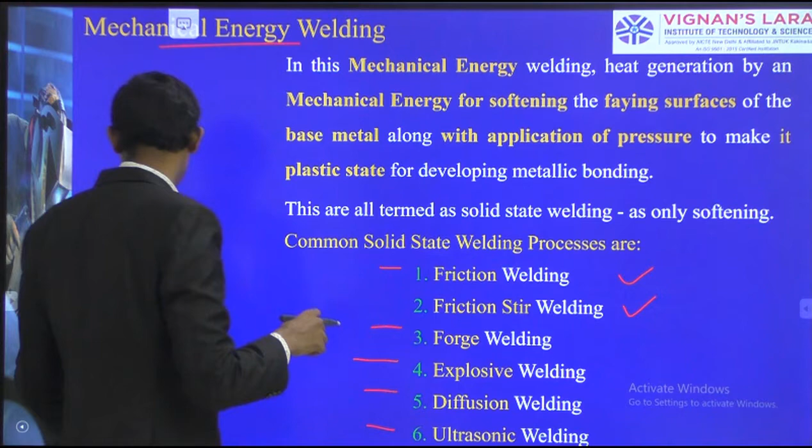In this class we are going to see friction stir welding. It is also one of the other methods of friction welding, even though the heating occurs by rubbing actions. It is another variant of friction welding.

What is the necessity of friction stir welding? We want to know. We have come across many arc welding methods and each has its own nature. When compared to SMAW and TIG welding, we have used inert gases.

Similarly, welding of aluminium is very difficult as it melts at a very low temperature, around 600 degrees. It becomes difficult to generate heat, melt, and solidify properly.

Meanwhile, microstructure changes also occur. Therefore we should not reach the melting point of the material. Accordingly, we have formed friction stir welding, a solid state joining process which will not reach the melting point, and therefore we can weld in the semi-solid or plasticized zone itself. The material is heated into a readily deformable condition, and at that time we give pressuring or stirring actions and solidify it.

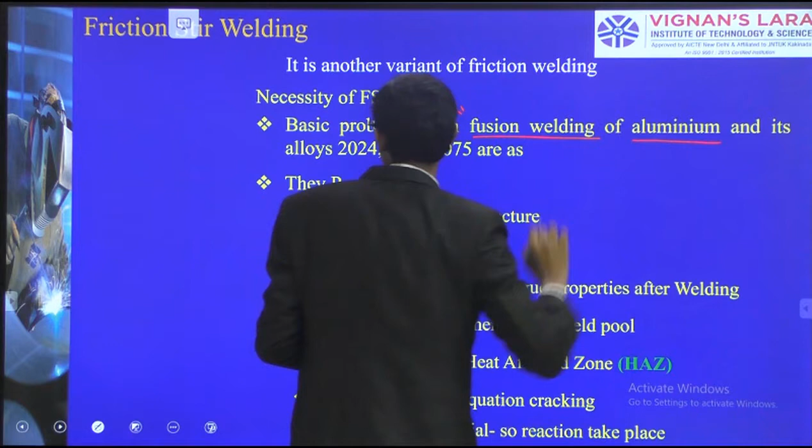So that is the basic problem with fusion welding. Fusion welding of aluminium, like some grades of 2024, 7050, and 7075, has the ability to generate dendrite structures, which we have seen in metallurgy during solidification.

Dendrite is nothing but a tree-like formation structure which is sharp, and these sharp incision points generate cracks, which is not good for the material. That should be avoided. In fusion welding of aluminium, dendrites form and should not. Then we should not do fusion welding at high temperature.

The temperature should be reduced, and that is why we go for friction stir welding. Dendrite structures also form porosities, and due to this, the mechanical properties and fatigue properties after welding reduce. We need more strength compared to the base material, but here it is reducing, becoming inferior.

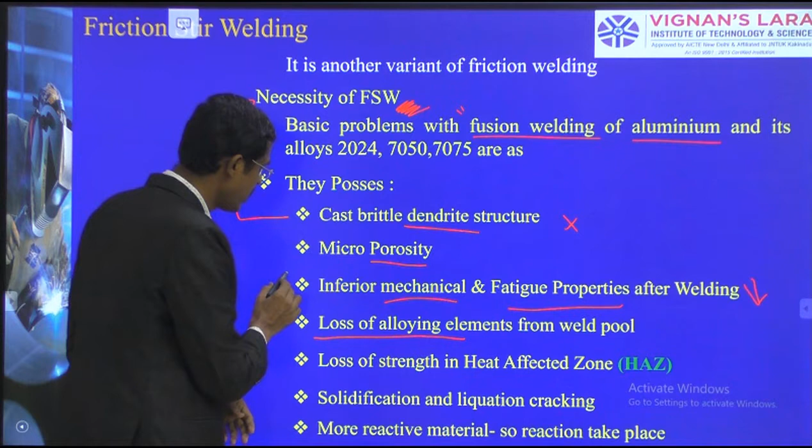There is loss of alloying elements. Some alloying elements which are added get evaporated due to the high temperature of the fusion welding process, so the benefit of elements added for improving mechanical properties is lost. This causes loss of alloying elements and loss of strength, inferior mechanical properties in the heat affected zones.

Solidification causes liquation cracking, as dendrites cause cracking. Also, aluminium is a more reactive material, so reactions take place, and at high temperatures, some reaction occurs.

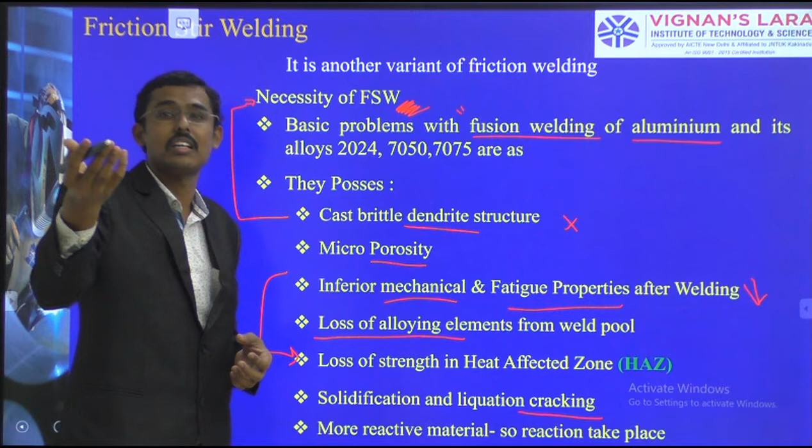When we increase the temperature of the specimen, the kinetic energy also increases and the reaction increases. Such things should be avoided, so this is what happens in fusion welding of aluminium.

Therefore we are trying to do aluminium welding through a solid state process, a solid joining method called friction stir welding. That is our idea. So how can we do aluminium welding by a low heat input process? We can do friction stir welding. That is what we are now going to see.

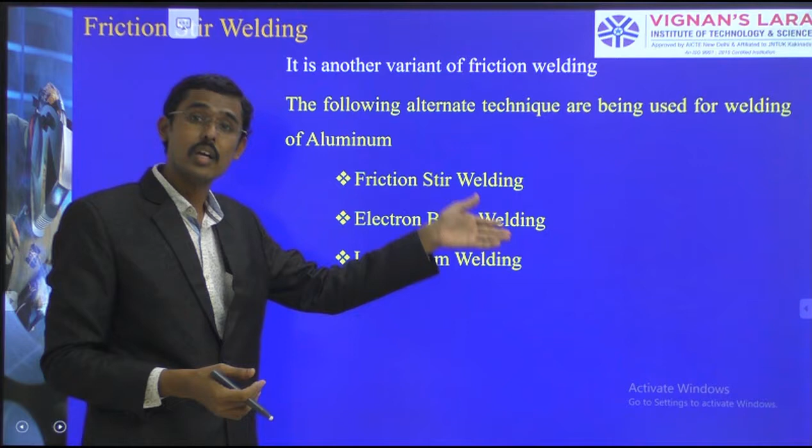Electron beam welding is also possible, and laser beam welding is also possible. But now we are going to see friction stir welding specifically.

It was invented by the Welding Institute of UK in 1991, a very recent invention. It is the most significant development in welding technology in the decade, and it is a green technology.

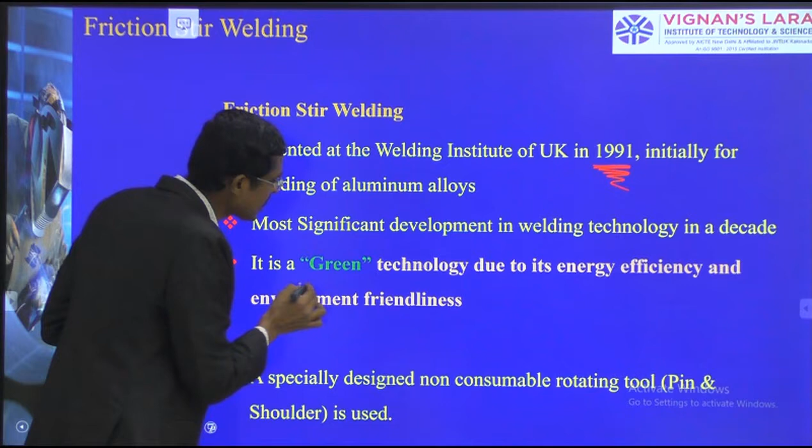What is this green technology? The same term we have already seen for friction welding. There is no smoke, no filler, no shielding gases, nothing, no spark. These factors make it environmentally friendly, a green engineering approach that will not affect the environment. Therefore we call this a green technology.

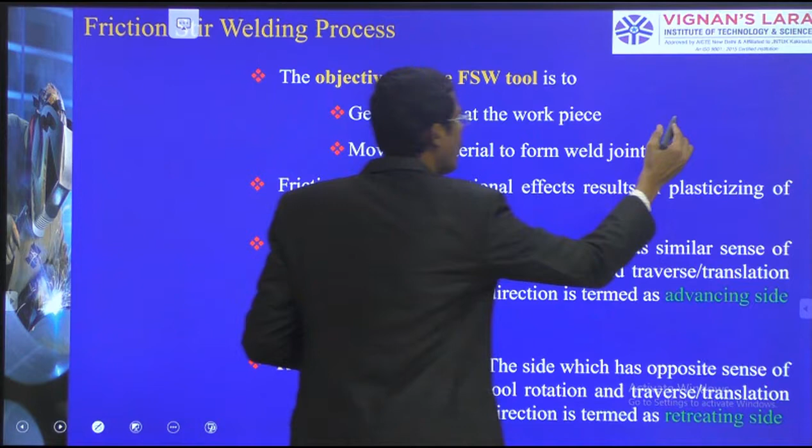So, the objective of friction stir welding: what do we have to do? In this method, I have taken two specimens, and I want to weld in this zone. I am inserting a tool here and going to stir.

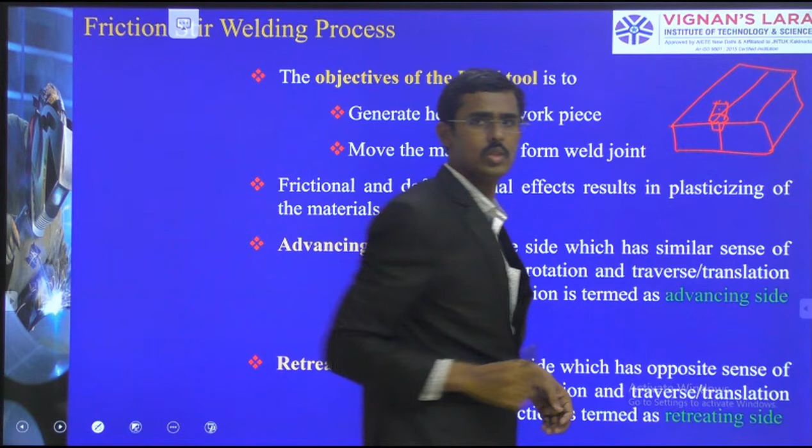This stirring action takes place. In such a way, the center part will stir, generating stirring action, which generates heat.

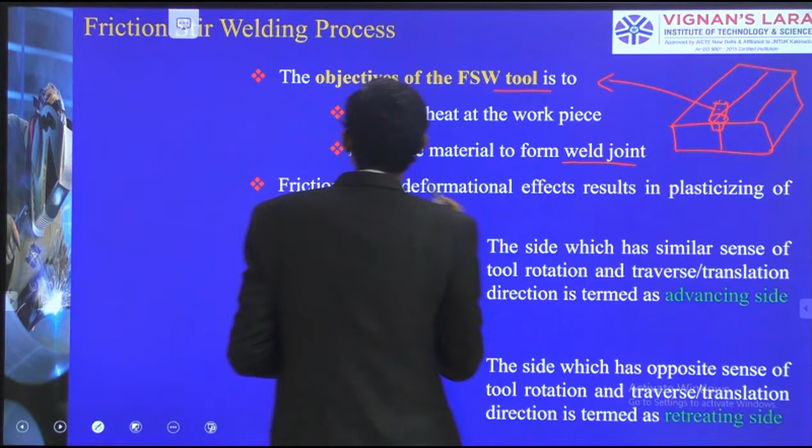The tool is going to make the plasticization zone readily deformable, generating heat at the workpiece. The use of this tool is to generate heat at the workpiece and move the material to form the weld joint. For these conditions, I am using the friction stir welding FSW tool.

Frictional and deformational effects result in plasticization of the materials. Here there are two categories: one I am calling the advancing side, and one I am calling the retreating side.

When the tool is rotating in this direction, I am calling this side the advancing zone or advancing side, and here I am calling this the retreating side. The clockwise rotating side is the advancing side, and the other side is the retreating side.

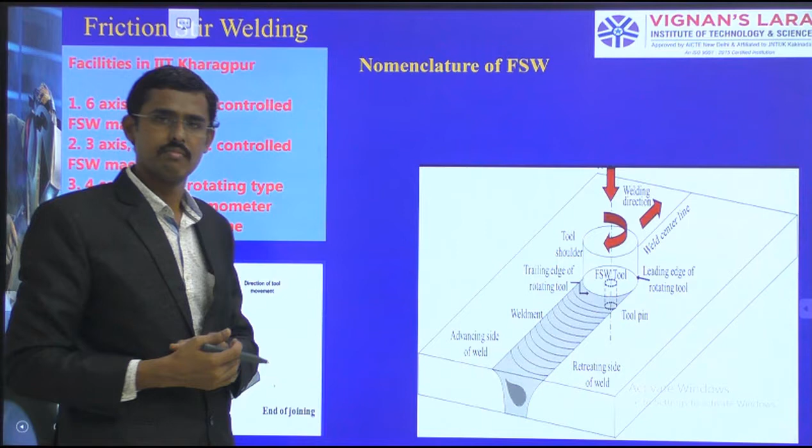So here we came to the setup. We want to weld two specimens, number 1 and number 2. Here we want to do the welding method, so how can I do it? I have taken one tool which contains a shoulder and a small pin.

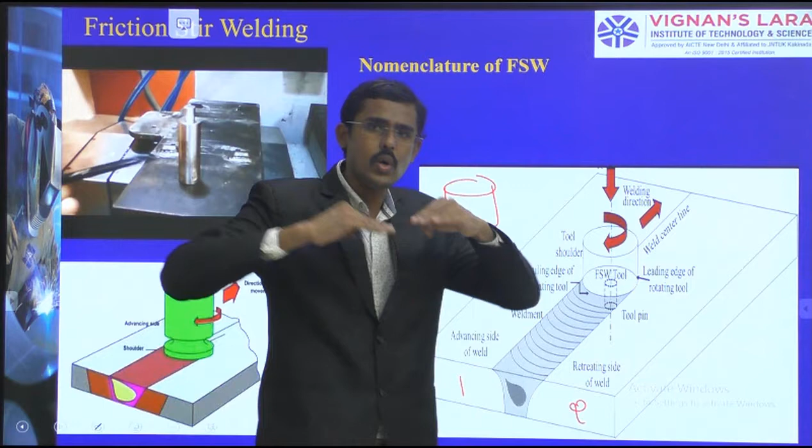This pin I am going to plunge inside the two specimens. Here there is no gap, zero gap, and we have not taken any edge preparation. Two flat specimens I have taken here, and I am inserting this tool by plunging, putting a hole and going inside.

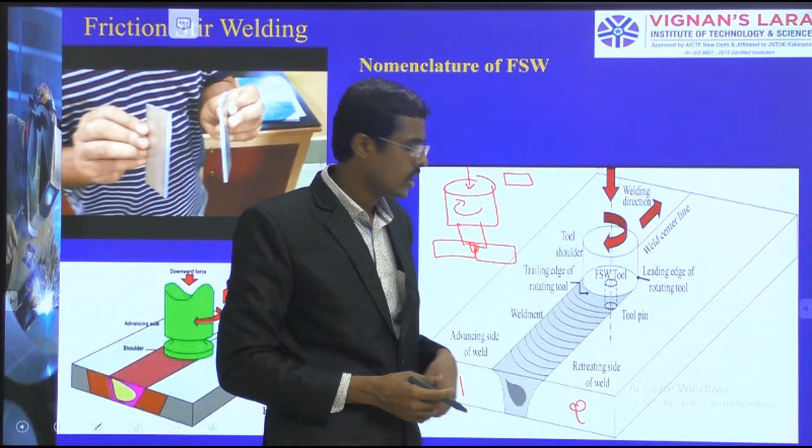After that, I rotate with the application of pressure and rotation of this pin, so stirring will happen. Application of welding pressure and stirring action on the friction stir welding tool generates stirring action in the middle. The advancing side material will go to the retreating side, and the retreating side material comes to the advancing side after stirring action.

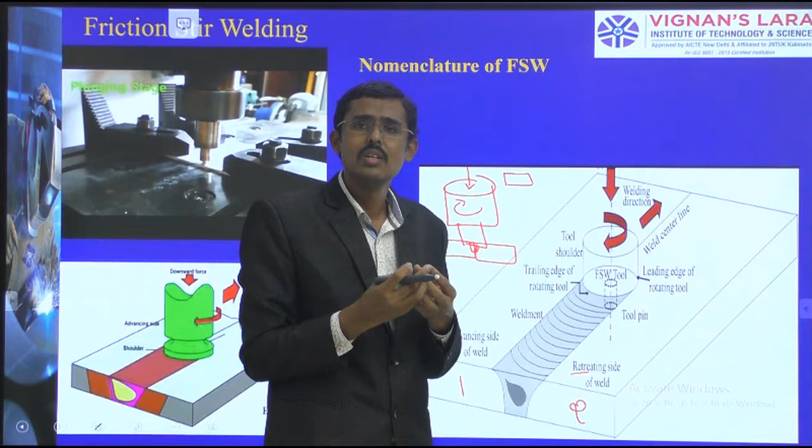Therefore, we will get equiaxed, minute, finer grains, which are directly related to high strength. So how are we doing this? I want to keep moving in this direction. After rotating and stirring action, I am moving towards the other end.

Here, see, in this there is a line, a straight line. There is no edge preparation we have done, it is flat. No V-groove we have taken.

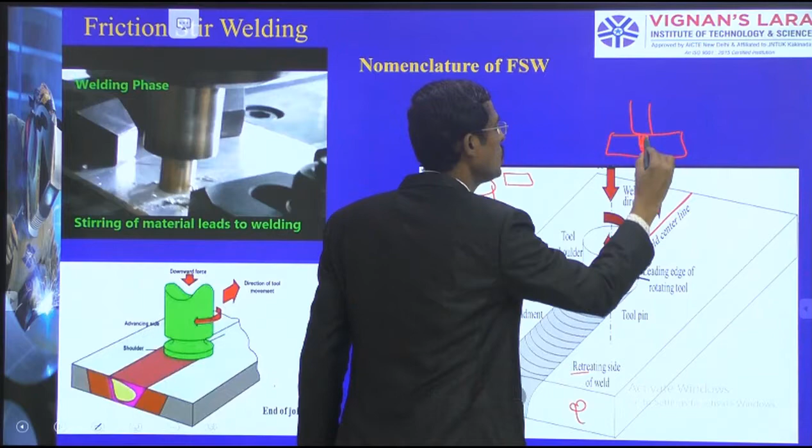Just like that, we have placed the tool here and plunged it inside. The tool plunged inside and stirring action takes place, and we move those things. In such a way, we can able to weld this.

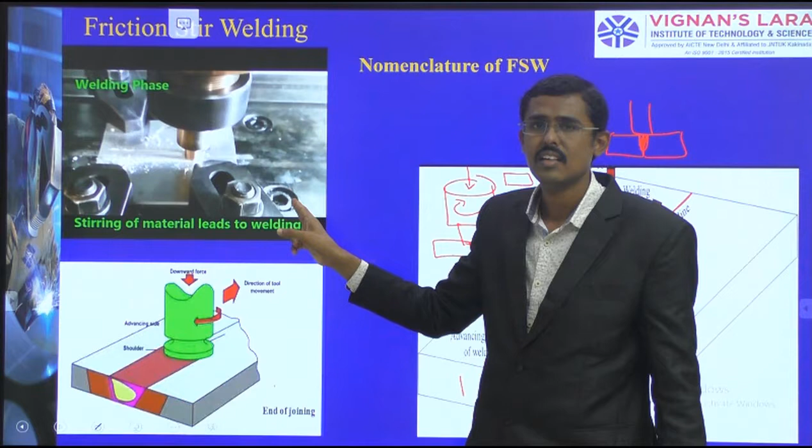The same video I have played here for our understanding. See, the two plates have been taken, in the welding phase we keep on rotating, and it moves from one side to the other side with respect to pressure and the rotation of the tool.

Two parameters I have used: for the tool I am giving pressure and also rotating the tool. See, after welding is completed, I have taken out the tool and cleaned it. Here we are getting a beautiful flat surface, but a hole is there.

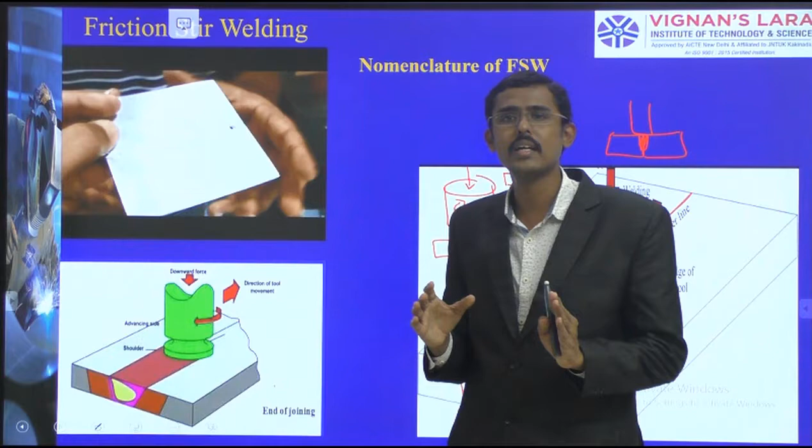This is to be cut as scrap, so this we can use. This total length we can use as a complete weld joint, with no edge preparation, no filler, no shielding gas. Only we have used the tool to rotate, with respect to speed of rotation and applied pressure, we can able to do the welding.

See how we can able to go ahead. A second video will play again here showing how these various stages we are calculating to do those things.

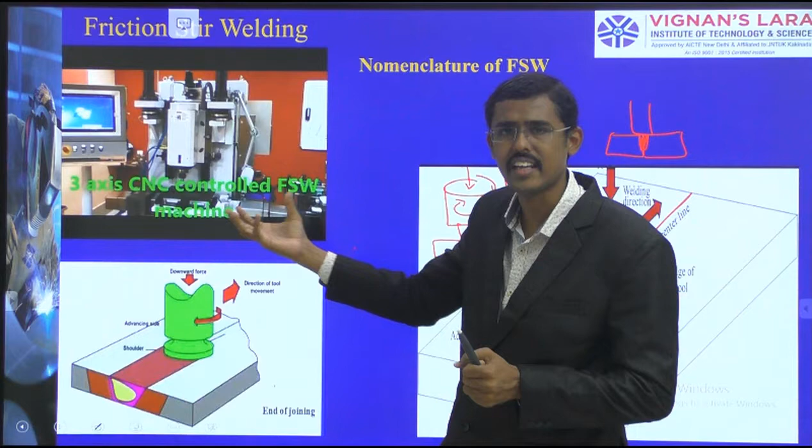This is the setup of the machine for the friction stir welding process, and it can be able to do in a simple CNC machine. We have a board and a setup and we can able to do this.

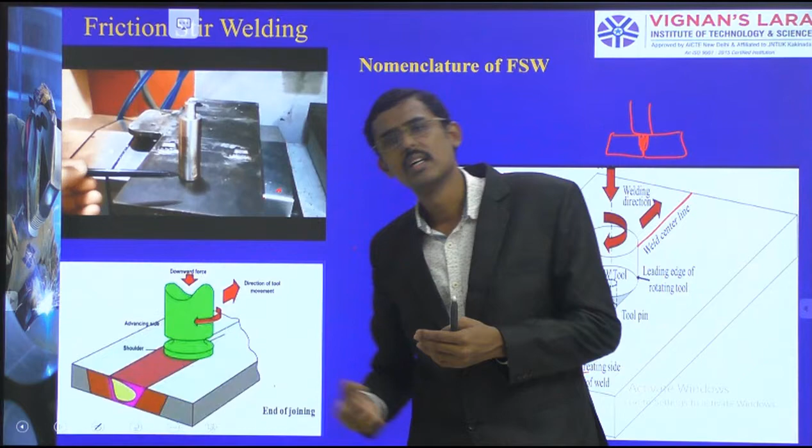See how the tool is used. This is called the shoulder, and the pin is there which goes in depth up to the total thickness of the specimen, not more than that. The pin profile should not be beyond the thickness of the specimen; it should be equal or slightly lesser, so in case of a 10 mm plate, we can take 9.8 or 9.7 for the pin profile.

See here in this setup we have the fixtures, and we have fixed the tool over these conditions. Now the plates have to be fixed in between those fixtures and the stirring action is to be done.

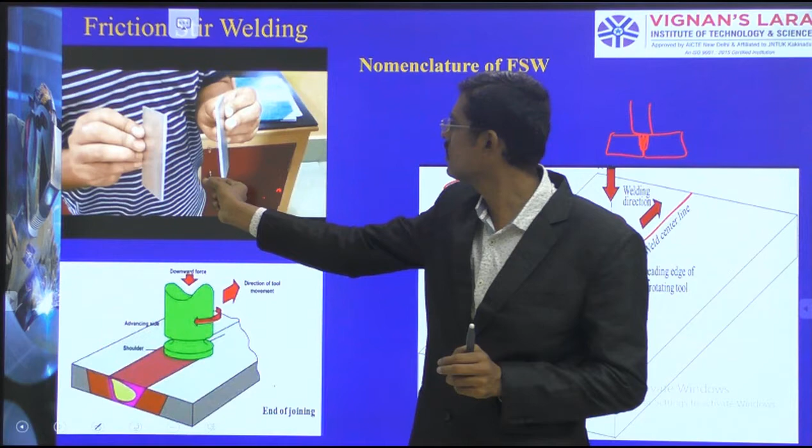We have taken two plates of aluminium AA1100 grade material. I am going to weld a small thickness specimen, maybe 2 to 3 mm thick. Aluminium has a low melting point, and it should not melt into dendrite form. Therefore, I am preferring this solid state joining method. Through fixtures, I have fixed it so no distortion will take place due to this fixing action.

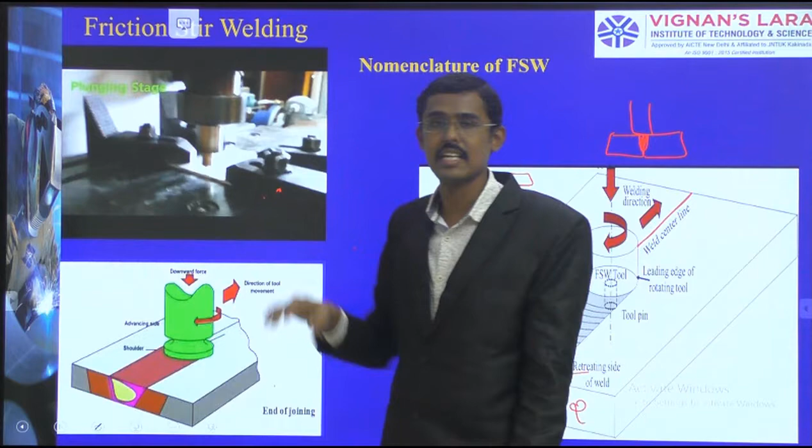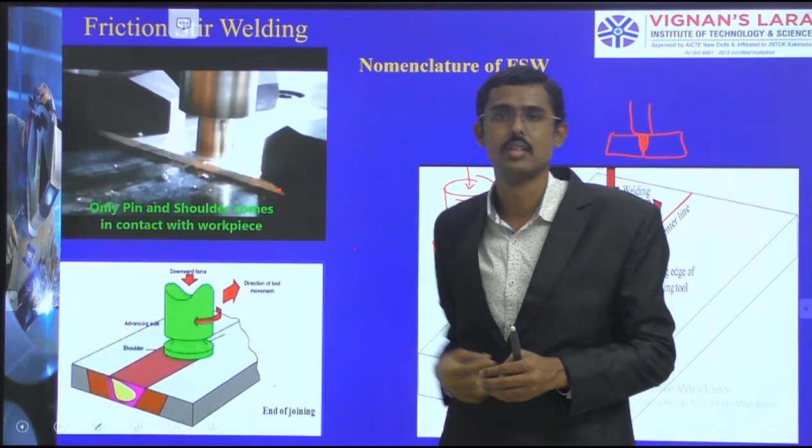So first, the plunging stage. I am inserting the tool from where the welding has to be started, plunging inside the workpieces. After plunging, we have to move. Heat generation due to friction and plastic deformation will take place there. After that, this plastic deformation due to the rotation causes material exchange from the advancing side to the retreating side and back. This rotating tool forces material all around, and therefore we are getting equiaxed finer grain.

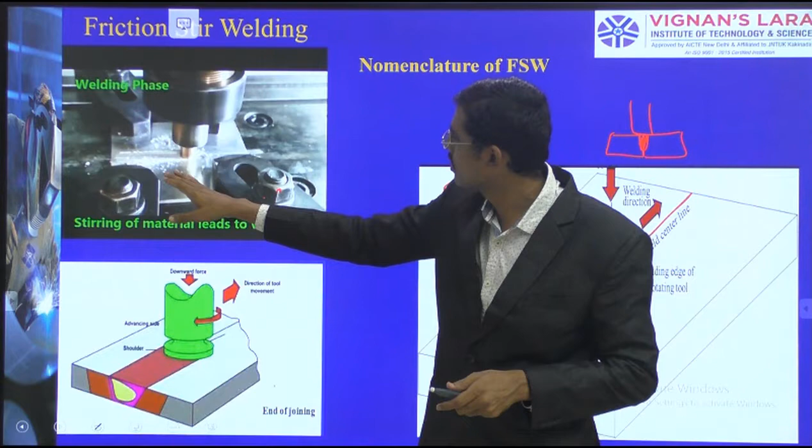Stirring of the material leads to welding, so joining occurs in the semi-solid state itself. We have not yet reached the melting point of the material. After completion, we get a smooth surface.

We have to know about the tool geometry also. The tool has a shoulder whose rotation against the job generates most of the heat required. How is this heat generated? We take a tool and rotate it, but the idea is the tool should be stronger than the aluminium workpiece. If it is lesser than or equal to it, due to the stirring action, the same melting point and same heating occurs.

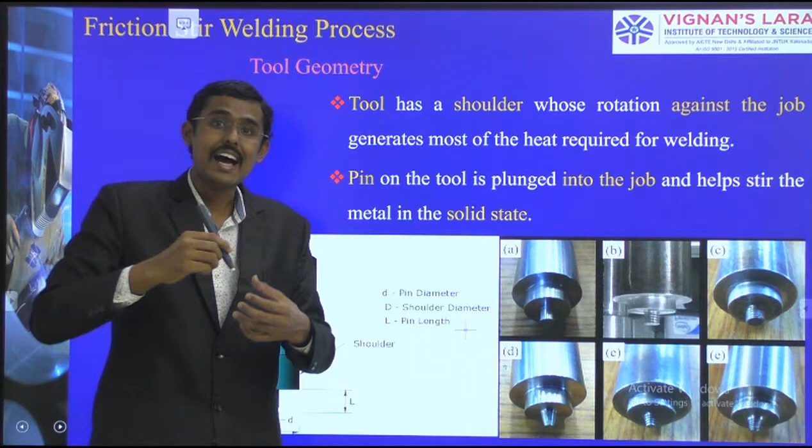Then, like the aluminium workpiece heating, the tool heating will also occur, so the tool will also wear, get damaged, or reach a plastically deformed state. If the tool itself is plastically deformed, it will also melt and mingle with the workpiece, and welding won't occur further. Therefore, the tool should have high wear resistance and a high melting point. The tool has a shoulder whose rotation against the job generates most of the heat required for welding - this is about the tool shoulder, this zone.

Where is the workpiece here? I have kept the workpiece in this zone - two workpieces I have kept. This is the pin, small, with length L equal to the thickness of the specimen.

So this pin is going to go inside and plunge, and we are going to rotate. I'm talking about the tool, shoulder, and pin. The pin on the tool is plunged into the job and helps the stirring action, keeping the metal in the solid state itself. In welding and stirring, we are not reaching 1500 or even 600 - aluminium's melting point of 600 we are not reaching. We are doing the welding itself at around 400, 350 degrees.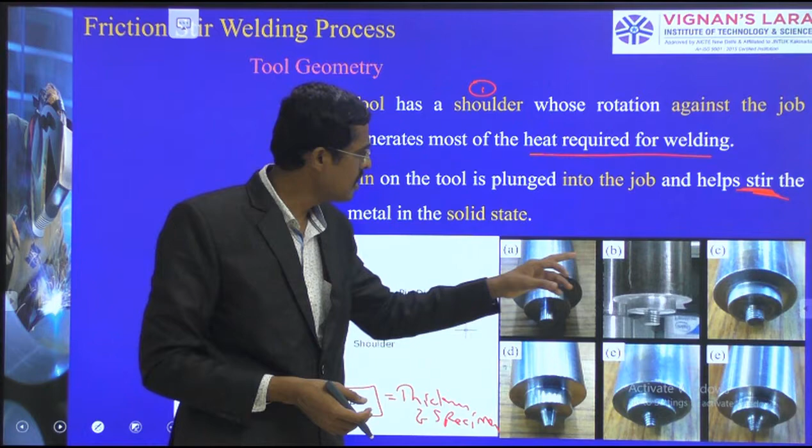So this research looks at how to generate heat with respect to various pin profile methods - cylindrical, threaded, conical, and conical threaded. Different methodologies create different forces, and with respect to that we can generate heat efficiently, or otherwise make the material finer. Due to these threading actions, the aluminium material becomes finer grained, so strength increase can be achieved through these pin profiles.

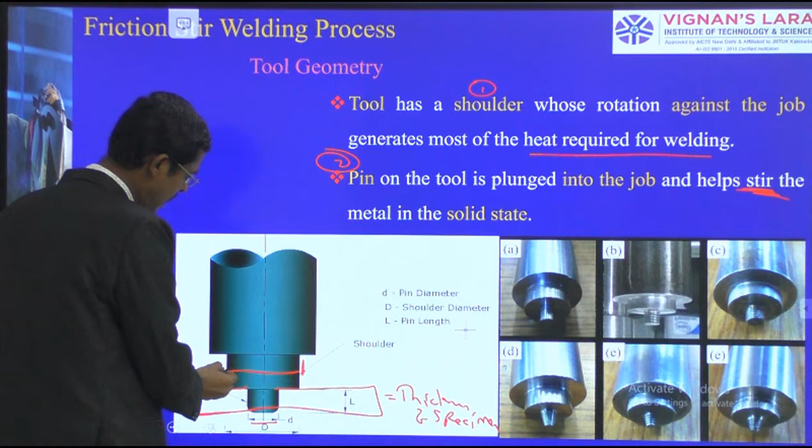See, this is the diameter of the pin - we should understand this is the shoulder diameter and this is the pin diameter. The pin goes inside, and the shoulder applies force and holds it - like a drilling action first. If it is drilled, the material inside comes straight out, but it should not, since we are doing welding. So it should be plunged back again, forced back again. Therefore, I am giving the shoulder diameter to stop the chipped material from coming out.

We stop the material there and press it back inside itself, and then the rotating and stirring moves on. That is the use of the shoulder.

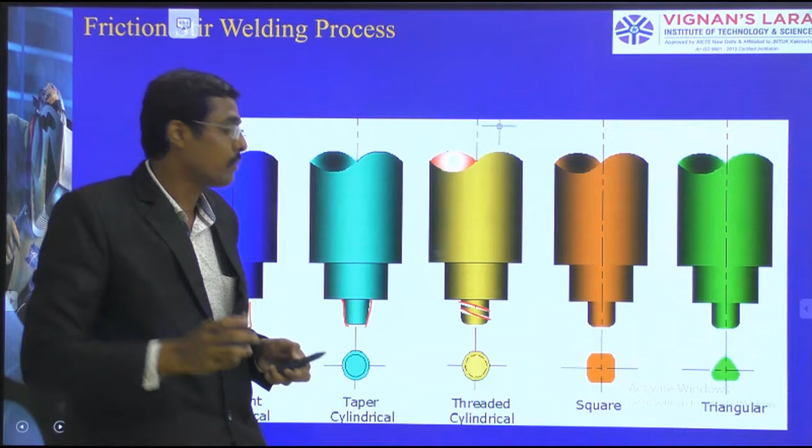So I have given different methods: straight cylindrical, tapered cylindrical, threaded cylindrical - see, threaded I have given here. These are the variants of pin profiles which generate different heat and methodology with respect to increasing mechanical properties. And maybe square - this looks like it, but it's at the bottom, it is a square, and then maybe triangular. Each one gives a different effort, different heat, and accordingly we can achieve good mechanical properties.

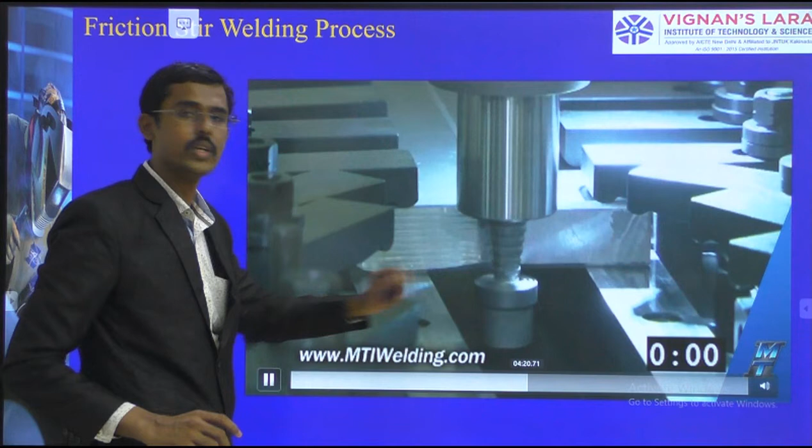So here I want to play a small video clip for your understanding - see how they are doing the welding. You can see there are two plates of different thickness, and we have a pin profile, a conical threaded pin. We have just seen this threaded pin, and now it is rotating. See, the shoulder is blocking the drilled chips so they should not come out - that is why it is blocking there. See, 22 seconds have passed - within a minute we will complete the welding process. It continues as a fast welding.

In an automated system, the welder becomes an operator, not a welder. For manual welding, it is a welder. Here, it is an operator.

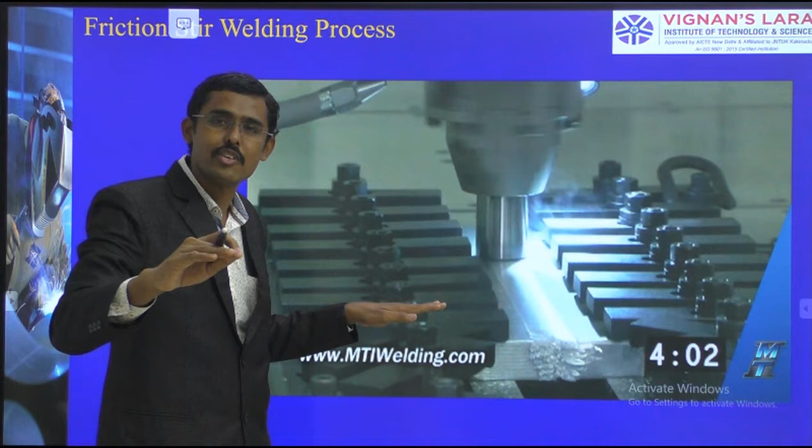So we will see how it is moving, and then further it moves. See how the weld surface looks, a very smooth surface. With respect to these forces, we are getting a beautiful smooth surface of the weld joints. Two specimens we have taken, and with respect to shoulder and pin rotation, welding completed smooth.

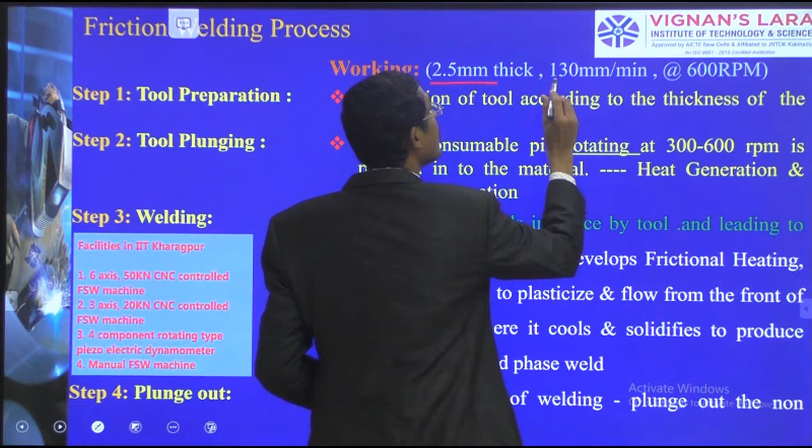Now we understand the working, but even so we will see further. For this work, we have taken a 2.5 mm thickness plate, moving at 130 mm per minute welding speed, with a tool rotating speed of 600 rpm. In such cases we are able to do it. It is a common range.

Stage 1, tool preparation. I am doing tool preparation first, whether it is a circular pin, cylindrical, or threaded. This preparation is done according to the thickness of the material. If the thickness increases, the pin profile also requires more effort.

Second, tool plunging action. We are going inside, a non-consumable pin rotating at 300 to 600 rpm. See, the tool is plunged into the material at this speed. Therefore, heat generation and plastic deformation occur. Now it is ready for plasticization.

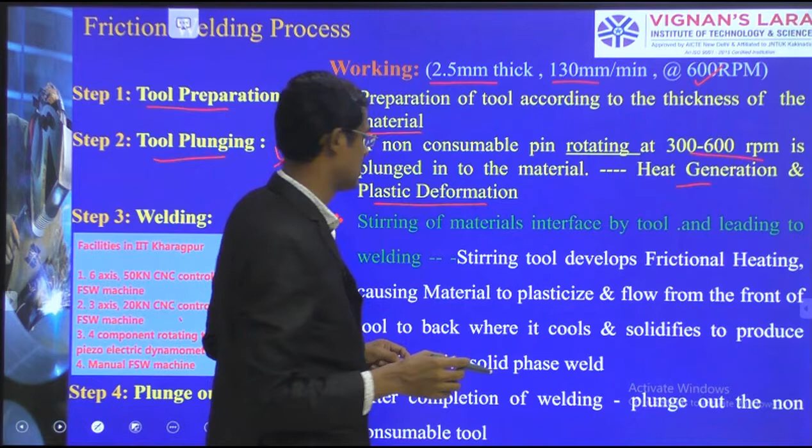Now we have to move and welding is done. Step 3, it is the welding method. What I am doing is stirring of the material interfaces by the tool and moving, leading to the welding action.

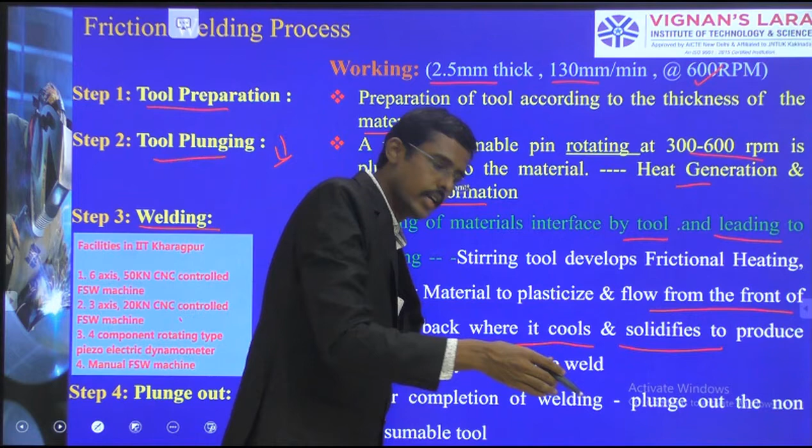What happens here? The stirring tool develops frictional heating, causing the material to plasticize and flow from the front of the tool to the back, where it cools and solidifies. So when the tool rotates and moves forward, it sends the plastic material backward. So it is tight rotating.

Fine particles we will get. And as the tool is moved, this region solidifies, because heat is generated here and we keep on moving. This heat tries to make the material plastic, and we keep on moving.

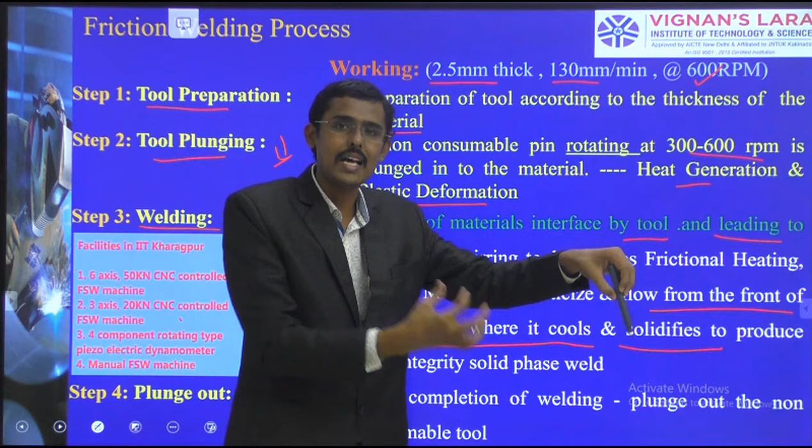This plastic material is already mixed with material A and material B, and it cools down as the heat moves forward. After completion of welding, we plunge out, the tool is taken out. That is step 4, plunging out the tool. So welding will be completed easily.

What is the metallurgical factor here? The finer grains, we have already told you. The material cools with a finer grain structure than the parent material, because we are not allowing it to solidify as is, since we keep on stirring. This stirring action causes splitting of the grains, breaking of the grains.

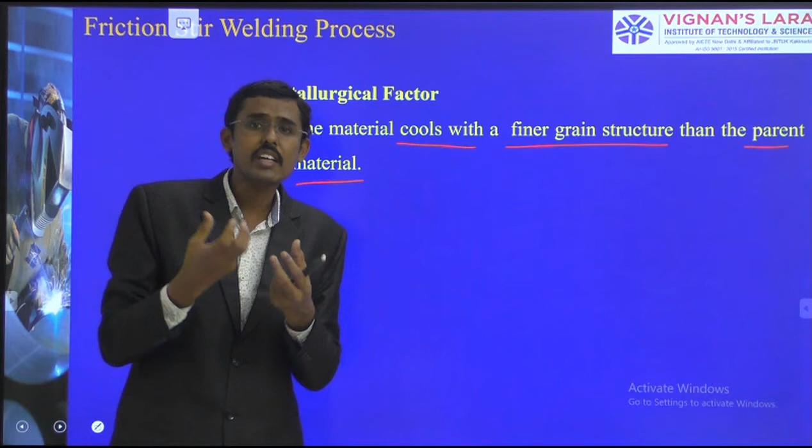If this breaking action happens, it is equiaxed, not developed by metallurgical solidification. Technically we know this, so these equiaxed finer grains we achieve through the friction stir welding method.

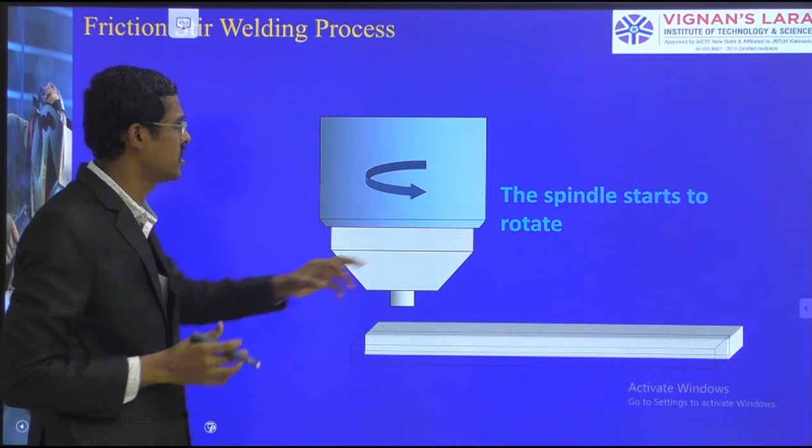So I would like to show you a small animation here, to see how this happens in a simple method. As we saw in the original video, the spindle starts to rotate and slowly comes down, and it has to plunge inside and move. See, it comes down and plunges inside the total thickness. There's a small variation, and then it keeps moving, and welding is done. A simple method to understand this.

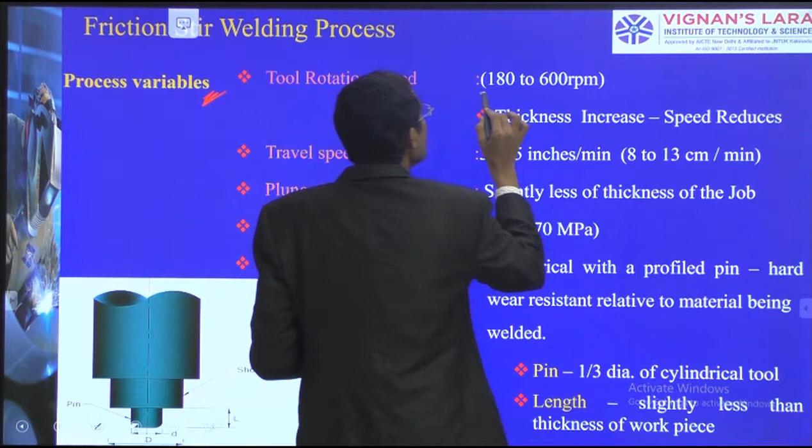So what are the process variables here? We know the process variables are tool rotation speed — the tool has to rotate, only then can heat be generated. How much? Approximately 180 to 600 rpm for aluminium. As thickness increases, speed reduces.

What is this idea here? Thickness increases, speed reduces, because we are using a small diameter pin. Diameter is equal to the thickness; the pin is equal to one-third of the diameter of the cylindrical tool. This tool tip is very pinpoint. If you rotate very fast at this hard point, the pin has a chance to break.

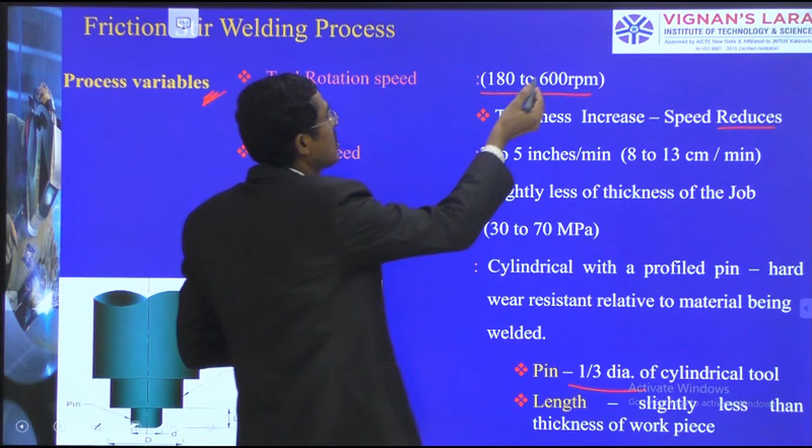It should not break. With a small pin, the entire heating occurs there, so we should carefully handle the rotating speed. 600 rpm is huge; we should use it for lower thicknesses. If the thickness increases, obviously the rpm also reduces. With large thickness, if we hit too fast, it will break soon, so we should rotate slowly when possible.

Then travel speed, how far? I am moving at 13 centimeters per minute.

13 centimeters per minute we are able to move. That automatic system, approximately it is like this, it may differ.

The plunging depth, how much the pin profile goes inside, is equal to the thickness of the specimen, or otherwise slightly less than the thickness of the job. In the video also we have seen the specimen went directly to this location and it has moved the thickness of the specimen. Plunging force should be held.

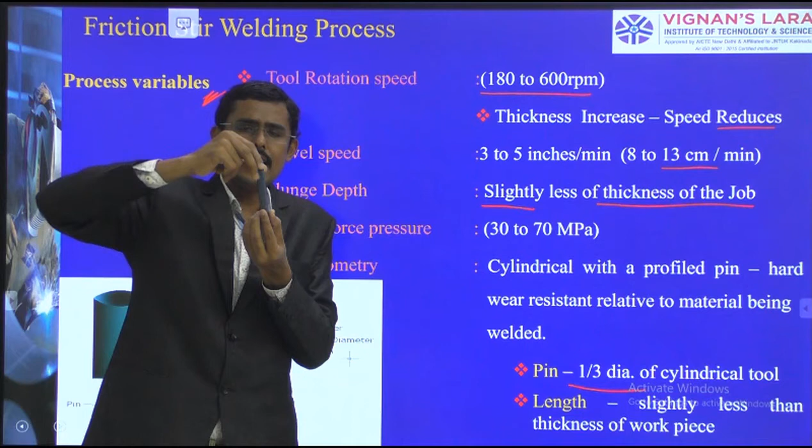The plunging tool is to be held here, otherwise it comes out. After drilling it will act like a drilling action. So it is to be tightened well, it should be rotated and then it should move. The shoulder should stop the scrap chips from coming out.

Therefore we should give pressure there, that is 30 to 70 megapascal approximately for aluminum we are giving.

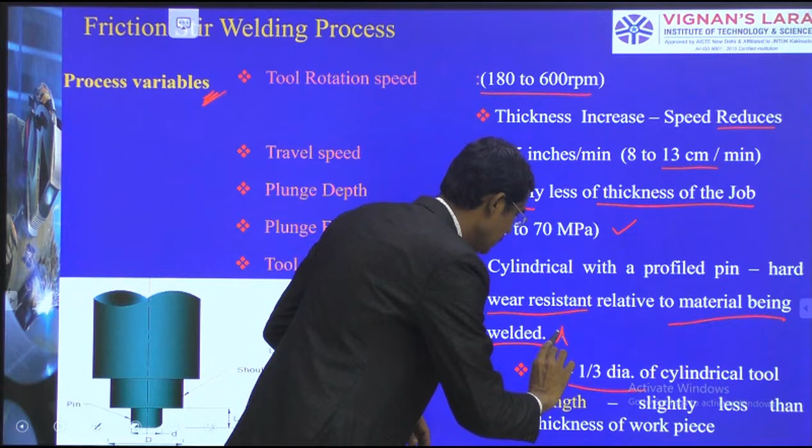Tool geometry, we know this. Maybe a cylindrical tool with a profile pin, having hard wear resistance. We need hard wear resistance relative to the material being welded. Which material are we going to weld? It is aluminum, so the tool's wear resistance should be higher than that of the specimen being welded.

So the pin is 1/3 of the diameter of the cylindrical tool, and its length is slightly less than the thickness of the plate. This point we have discussed here.

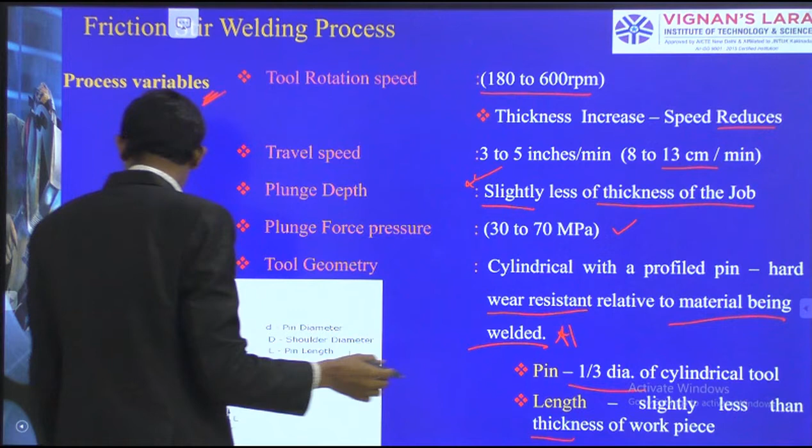So the tool rotation may be clockwise or counterclockwise, any direction. Whether I am rotating and moving forward in this direction or that direction, whatever it is, the idea is that tool rotation results in stirring and mixing.

Higher the tool rotation, higher the temperature generated. The tool should rotate at high speed, then it generates high temperature. Then what should we do? The tool should be selected having a higher melting point than that of the material we are going to weld.

If aluminum is going to be welded, we should take steel or titanium, carbide, some hardened material. Then only it won't melt and it won't wear. If it wears by stirring actions, what happens? The pin will wear out, and then where is the pin to rotate? The pin will not be there. Therefore, high wear resistance material is to be selected as compared to the working welding material.

So high tool rotation causes high temperature. If we take an aluminum tool for aluminum material at high temperature, it won't work, it will melt. This should not happen, it is to be taken care of. Due to frictional heating this results in intense mixing and stirring.

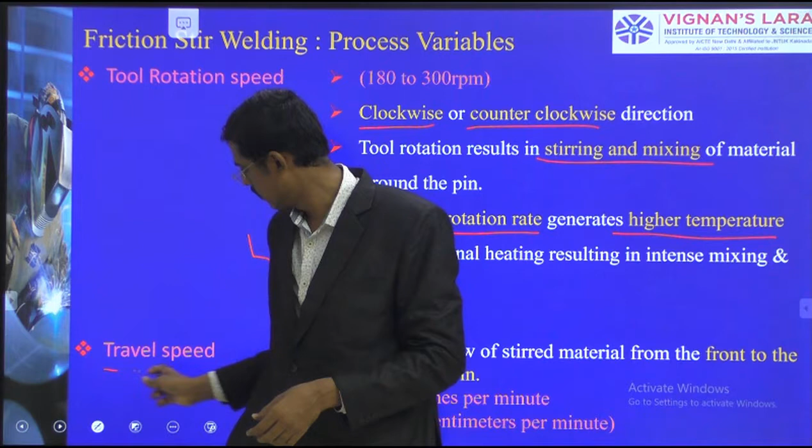Now, travel speed. We have seen this, it affects the flow of stirring material from the front to the back. How fast it is moving - accordingly the stirring and the mixing will happen there.

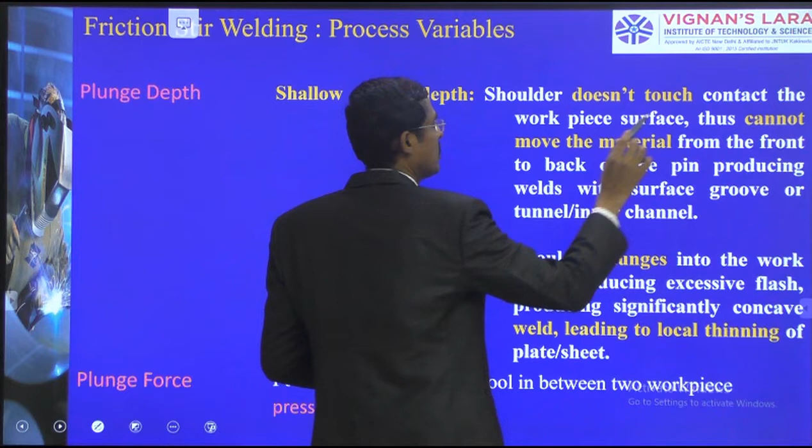So shallow plunge depth and deep plunge depth, which one do we need? Shallow plunge depth does not touch the contact workpiece surface and thus cannot move the material. But in this deep plunging method, the shoulder plunges into the workpiece, producing excessive flashes, a significantly concave weld, and leading to local thinning of the plates. So this is to be taken care of.

So one more thing, plunging force is around 30 to 70 megapascals. We have already seen the various pin profiles. One important thing we have to consider is the microstructural classification, how this is formed.

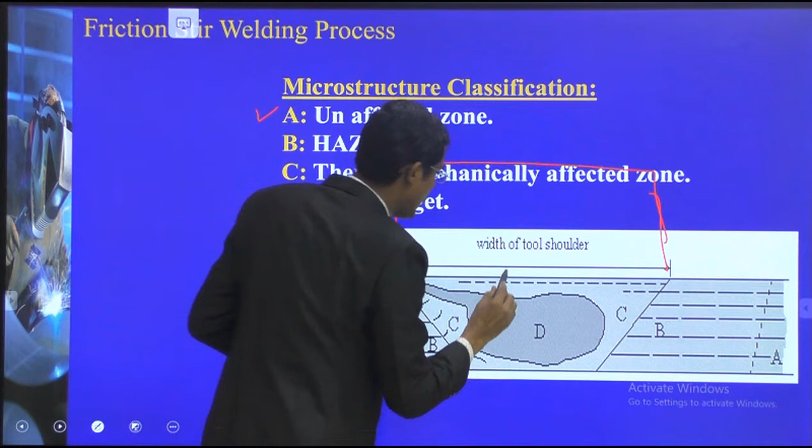I am telling you part A is the unaffected zone, because this is the microstructure of the cross section I have taken. After welding I cut it and I am seeing here how it happens. I have welded here, this is the zone, see. Let us consider I have welded in this setup. So here this is the shoulder and I have welded here. So this is the setup, please carefully understand. So shoulder I have kept and this is the workpiece.

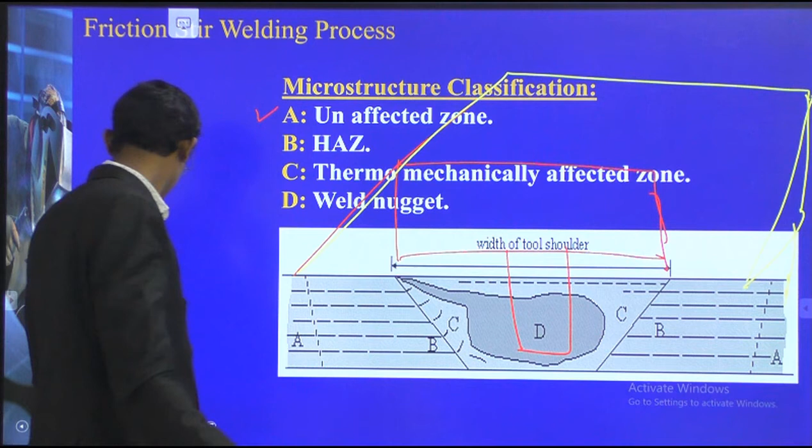So I can tell it like this. So this is the workpiece, here or there, so workpiece it will be. So here I have a pin tool, here I have the tool. So the rotating point is D. D is going to receive more heat.

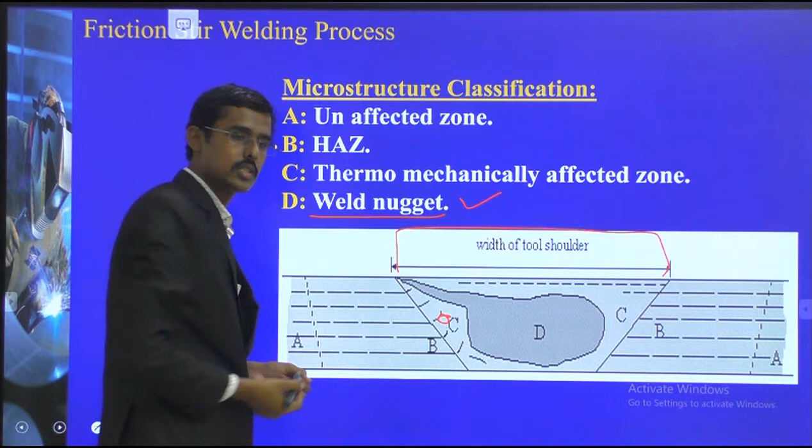So D is the weld nugget, and then the nearby zone, nearer to D, I have C. C belongs to the thermomechanically affected zone. Then B, it is heat affected, mixing does not happen here. But when the pin profile creates a stirring action, the metal itself mixes. But at point B, only heat is distributed from the pin to the workpiece. So both sides will be heat affected zones and the other two ends are unaffected zones.

So the advantages: no filler, no flux, no shielding gas. Therefore we are having the fixtures, therefore no distortions, no smoke. It is called environmental engineering, green technology, with narrow heat affected zones, finer grains and recrystallization microstructures.

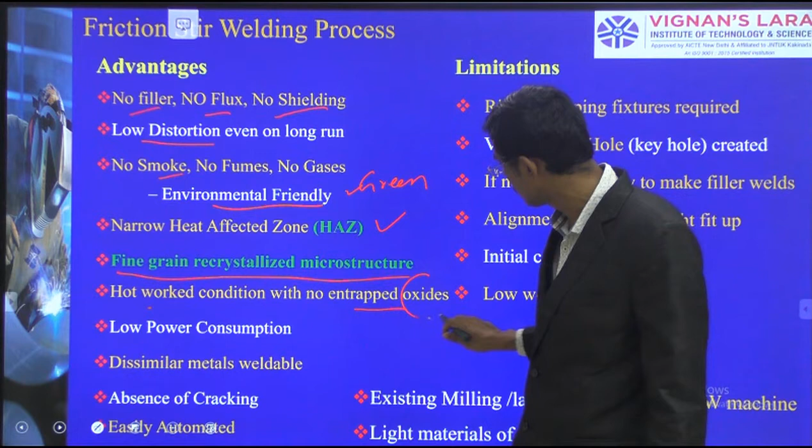We are getting hot worked conditions with no entrapment of oxides. In the fusion welding process, oxides also take place, but not here. We are not using CO2 gases, and there is low power consumption, so dissimilar materials we are able to join - one side aluminum, another side steel. But it also has more limitations.

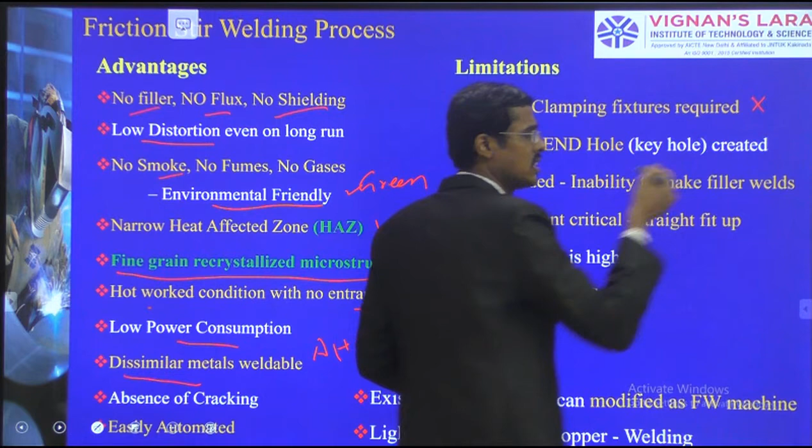It requires rigid clamping fixtures, as we have seen in the video. There is a visible end hole at the last, as we have seen - one small end hole comes, and that has to be taken care of. It should be cut as scrap.

If needed, the inability to make filler welds - we are not doing that, only the tool is rotated and it's welded. Alignment is critical, straightening is needed. Initial cost is high and welding speed is low.

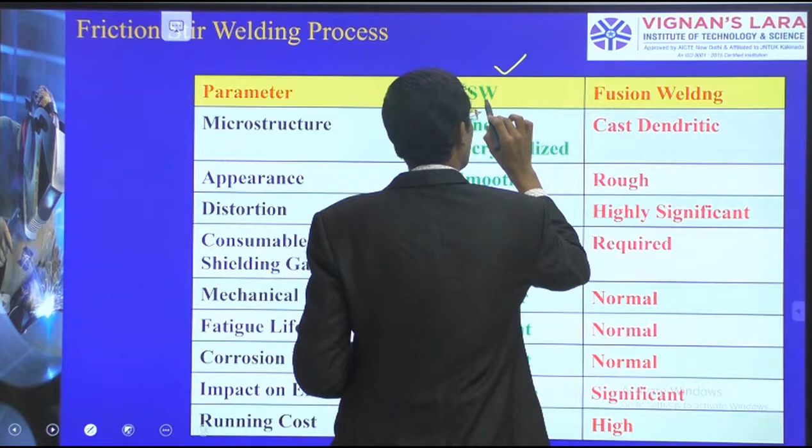I am comparing here two methods - one is friction stir welding process, meaning solid state joining, and fusion welding. I am comparing these two with respect to various parameters.

Microstructure here in the friction stir welding - I am getting finer recrystallized materials. Due to this rotation, we are breaking the development of the grains, so we are getting finer grains. In fusion welding, the cast dendrite forms, which is dangerous.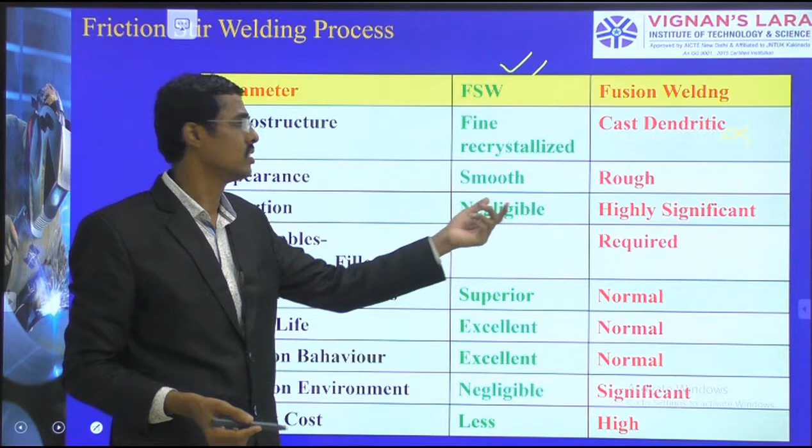The appearance is very smooth, as we have seen in the video. In fusion welding it is very rough. Distortions - we are using fixtures, so it is negligible here, but highly significant there. Consumables - we are not using any gas, fillers, or flux, nothing is used here.

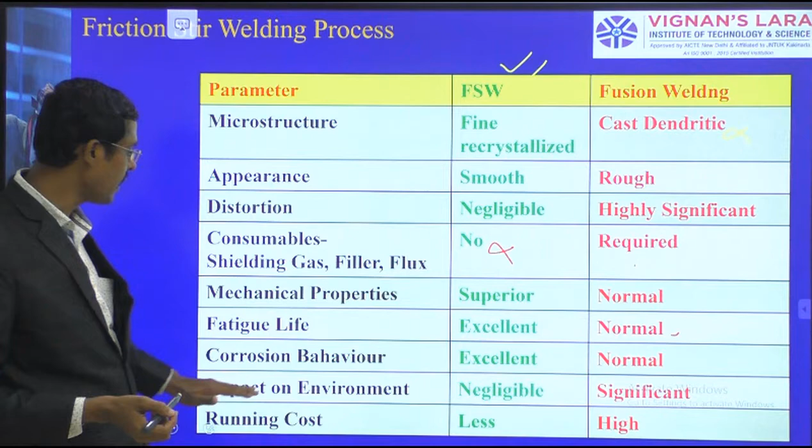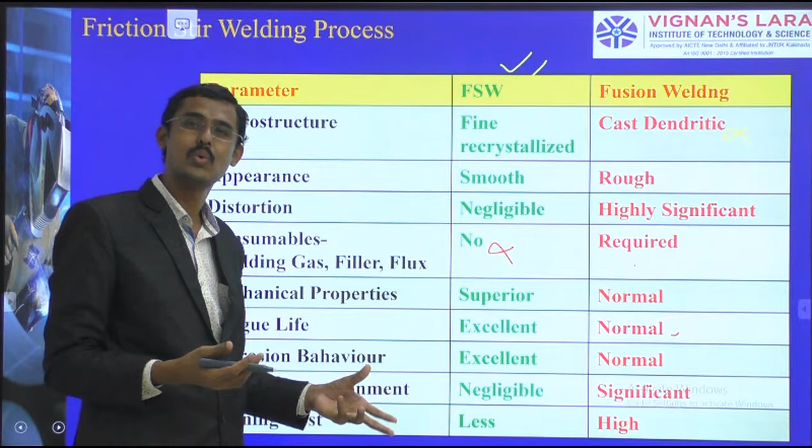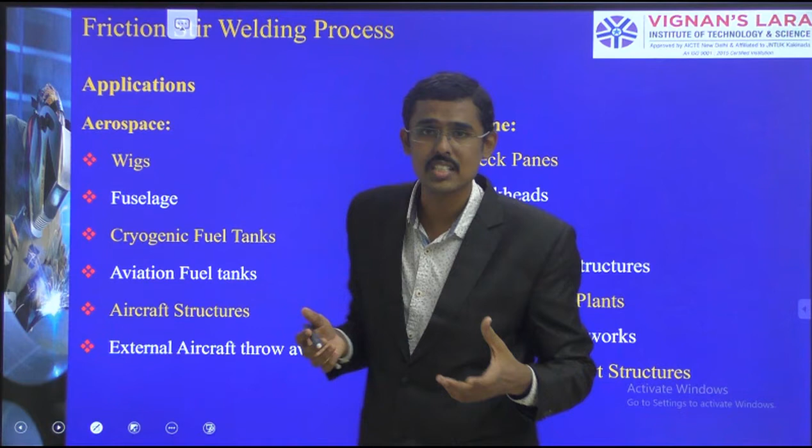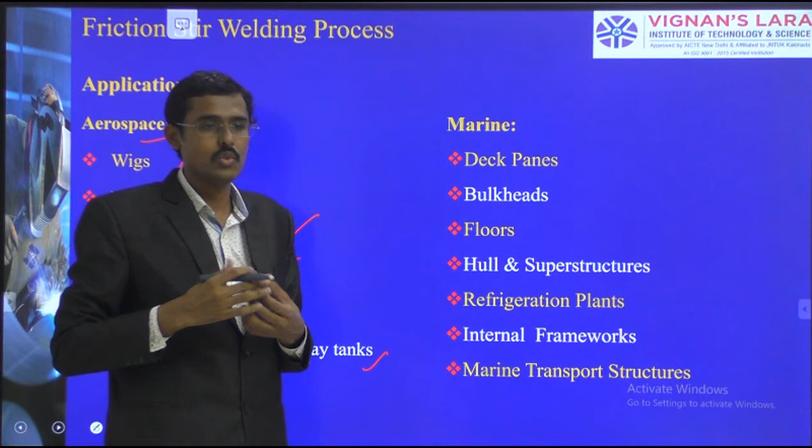So what are the applications where we are using this? In aerospace - wings, fuselages, cryogenic fuel tanks, aviation fuel tanks, aircraft structures, excellent external aircraft throwaway tanks - these are parts made of aluminium. This application comes in aerospace to reduce weight so we can fly. We should not use heavy steel materials. So we use aluminium, but if fusion welding is used on aluminium, its properties will change and dendrites will form, which should not happen.

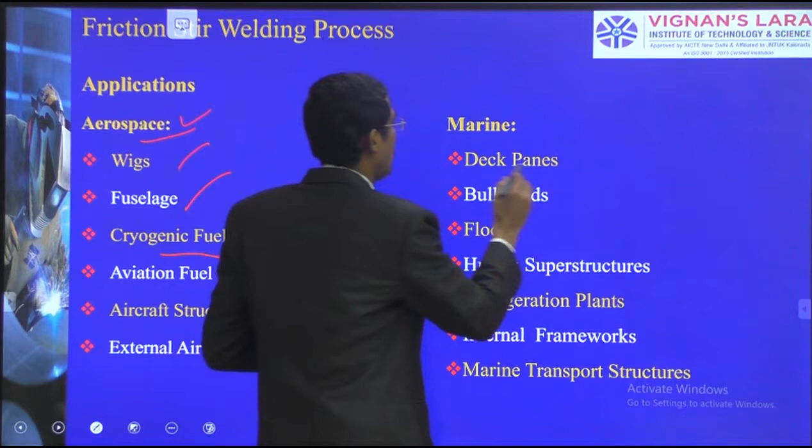So again we go for the solid state joining process. This is obviously connected with aerospace applications. In marine uses - deck panes, bulkheads, floors, hull and superstructures, refrigerating plants, and many more. Also in automotive construction - chassis cradles, wheel rims, tailored blanks, armor plant vehicles, motorcycles, bicycle frames - we use it to get strength.

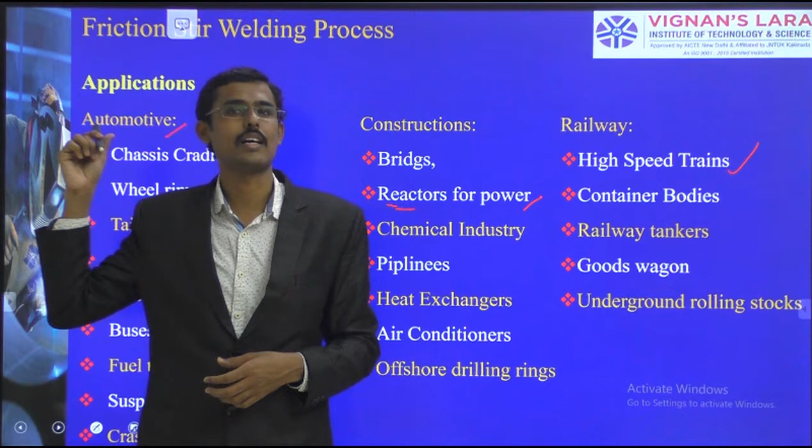And then fuel tankers, suspension parts, everything related to automotive. Related to construction, we see power reactors, chemical industries, pipelines, heat exchangers, air conditioners, offshore drilling rigs. In railways, high-speed trains carrying more weight cannot move as fast as an airplane, so we reduce weight through aluminium, making it a high-speed train. Fusion should not be used here, so we go for solid state joining. So container bodies, railway tankers, wagons, and underground rolling stock - many applications are there.

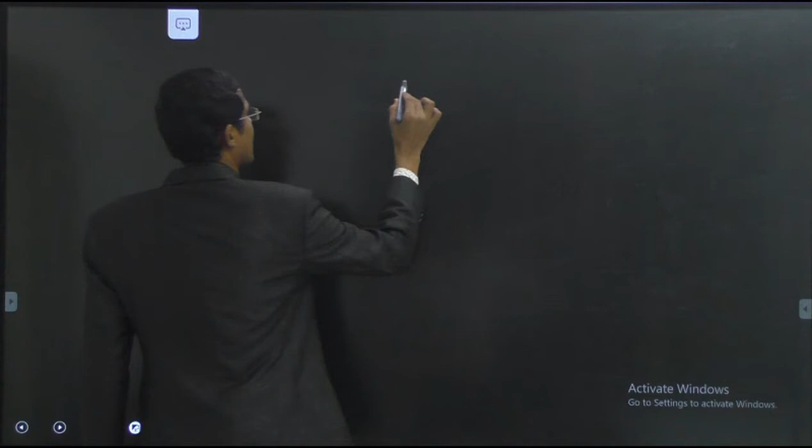So, the summary - in welding, we have seen today about the solid state welding process. In this we have seen about friction stir welding, its advantages and applications. The remaining part of the subject we'll see in the next session. Thank you.